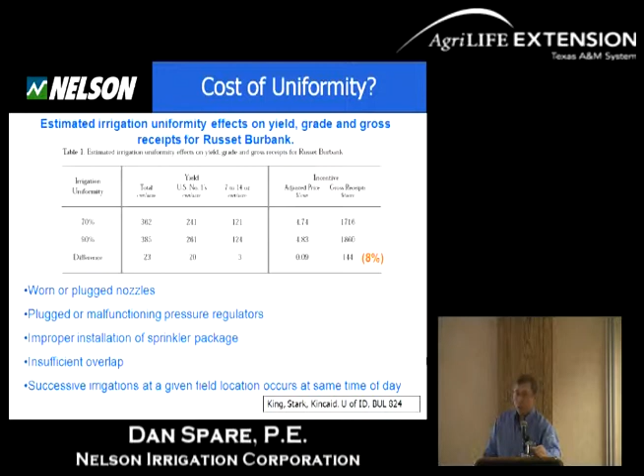Mounting height plays a big part in coverage, and it's all going to play a part in your decision. If you have a sprinkler that has 8-foot drop height and you're thinking of putting it at 3 foot, what you'll be doing is reducing the coverage diameter by 20%, reducing your coverage area by 36%.

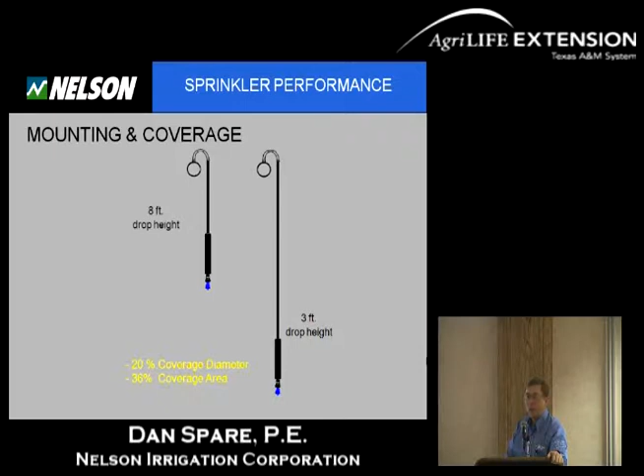This is just one example of a certain sprinkler, and you have to look at the kind of sprinkler you have and the data that the manufacturer provides. That kind of information will be available as to the coverage diameter at a certain height. So these aren't figures just across the board, but specific to a given sprinkler. And you can find that for most of the sprinklers on the manufacturer's websites.

Now, pressure regulators and pressure considerations are really important in getting uniformity right and having a pivot system that operates well. I'd like to really emphasize, make sure that you know what pressure you're putting into a system, especially if you have pumps that are used year after year, and you've got sprinklers that have been there for quite some time. Keep yourself in the know. Keep yourself aware of where that system is performing, and pressure is really important. Making sure that you have a working pressure regulator is also very, very important.

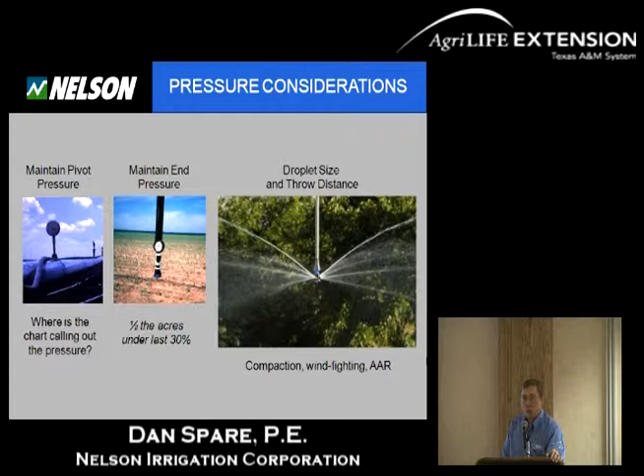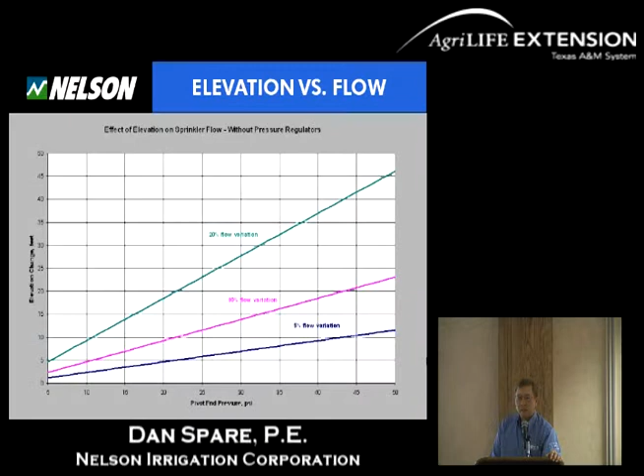So I wanted to get to a good example. Let me skip a few slides here because we're coming to a couple other examples I want to make sure you get.

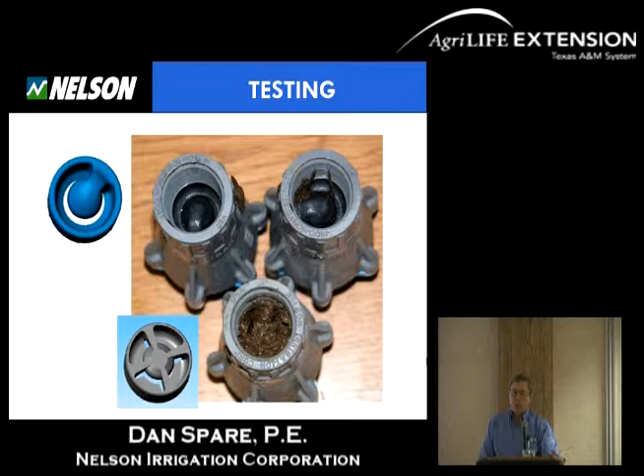Pressure regulators that have been manufactured from our company in the past few years have made a significant improvement. The one on the lower side has the inlet with struts, 4 struts there, and the improved intake has only 1 strut, and in fact the design is so improved that material of biological nature that comes through there can easily move right on through it now with our new design. So that has really helped.

Talking about pressures, if you don't have access to pressure on the end, you can use a pitot tube with a pressure gauge and just read the pressure at the outlet of a nozzle, and that should give you a pretty good idea what pressures you've got.

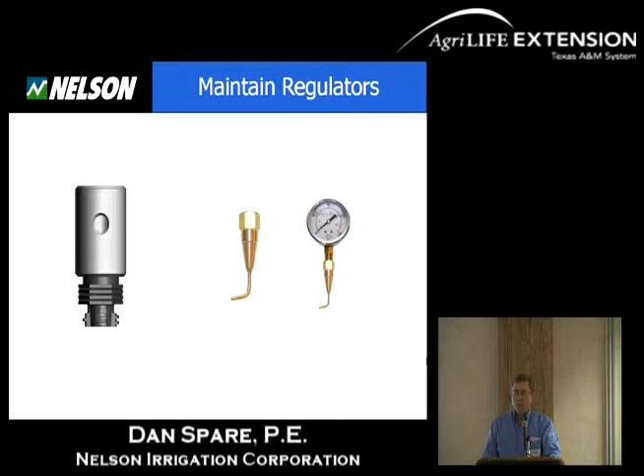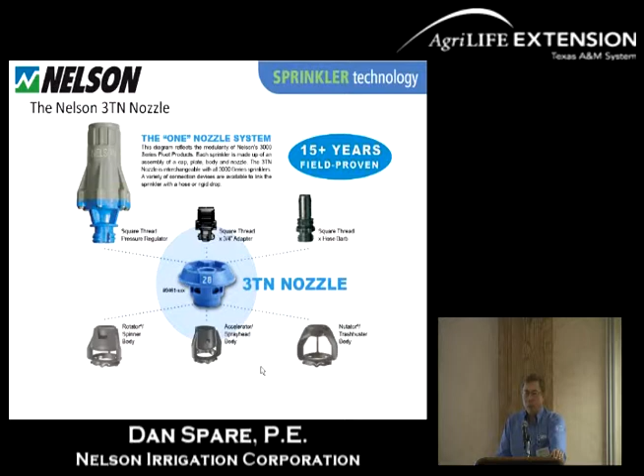Okay, I wanted to just review some of the recent additions to our product line that have been introduced by our company and help a grower with a pivot have some additional tools that they may use. This is our Orbitor, introduced this past year. This Orbitor has no struts through which the streams of water pass, or by which they pass. Therefore, it's really great in environments with some wastewater applications, or where algae may be coming out of that sprinkler system or through the pivot.

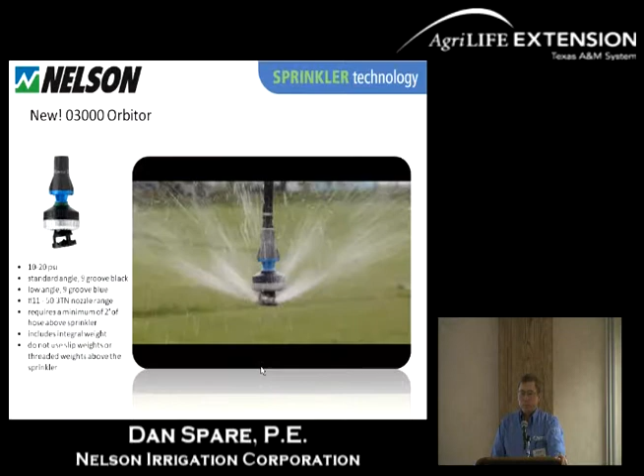Here it's moving through a cornfield. Its design is such that it doesn't catch very easily at all on other materials. Okay, and so that's our Orbitor. And we've got a throw diameter on one of the two models that we have of 58 feet at a 6-foot ground height, with a 15 psi pressure rating.

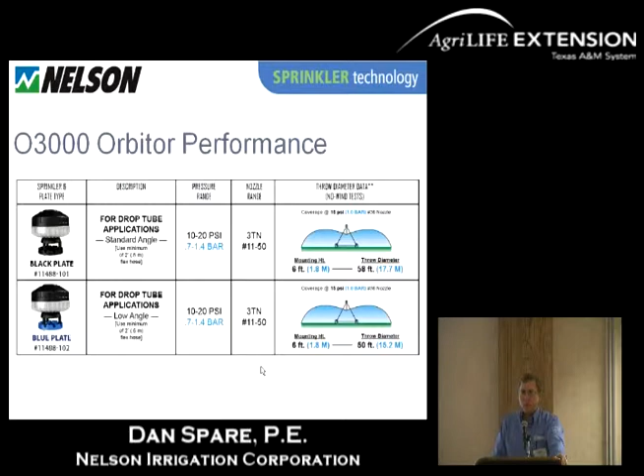And we've also got this year an accelerator with a gold plate, and this one might be of real value for people using lower pressures. It's rated in the 6 to 15 pound range, and operates much like the rotator at lower nozzle output, and as the nozzles increase in size, it starts to turn a little faster. It's got a throw diameter of 54 feet at a 6-foot mounting height and 10 psi.

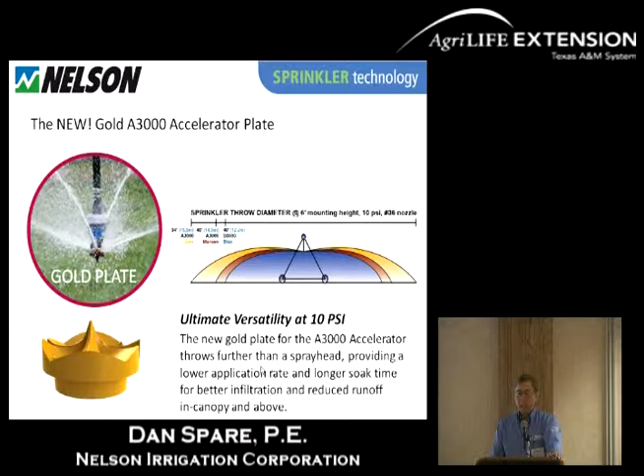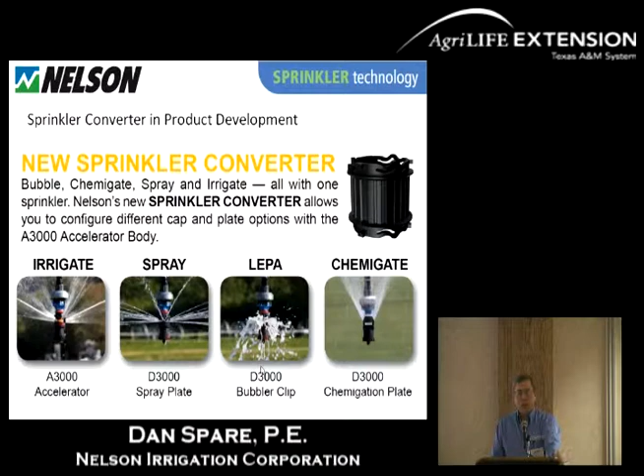So that may be of some value to those who are trying to achieve less runoff, as replacements for some spray plates. That data is all available on the website. We've also got a new sprinkler converter that allows us to keep some of these spray plates and accelerator pads together, and this one shows the 3-in-1 adapter. So you've got a spray plate to the left there. Underneath it would be the bubbler, an accelerator over on the right side, and the sprinkler converter.

And it's going to show you the action of those devices. There's a spray plate. That was the brown plate, spray plate. It has 3 trajectories coming off of it. Here's our accelerator, and gold plate accelerator.

Hello? Wake up. Acts like it's hanging up on me. See if I can move on here then. Okay.

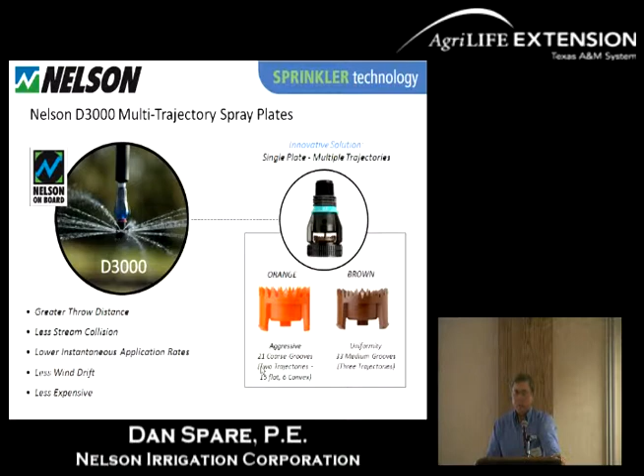And then the converter is able to hold those devices together so that between times in the season you can change those and have them available right there on site. So now there's also the bubbler clip, and you're probably familiar with the bubbler here. It can attach to the D3000 body and allow water to come down within a short diameter right down to the soil in a gentle way.

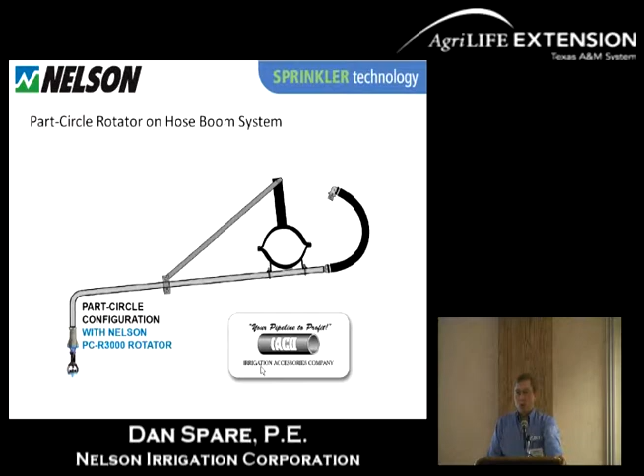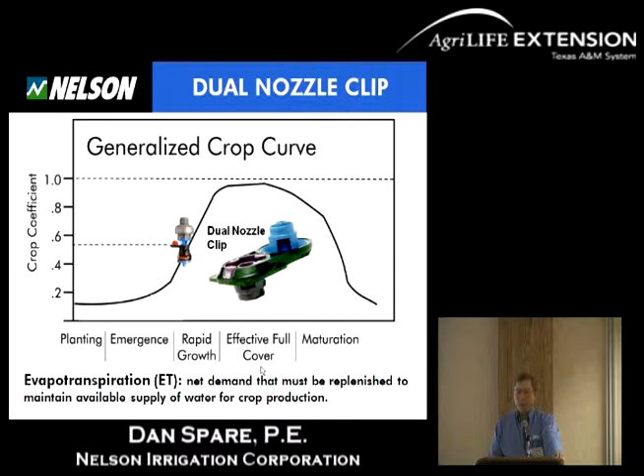And then a hose boom adapter can be used as well. We have one of those available. So if you have a need for part circle devices, and those can be used on hose boom systems, those are available. And I'll move on through that one. And a dual nozzle clip can be used where you have early in the season a need for one kind of plate or nozzle, and you want to nozzle it up for later in the season. That dual nozzle clip can be used. And then a triple nozzle clip is also available.